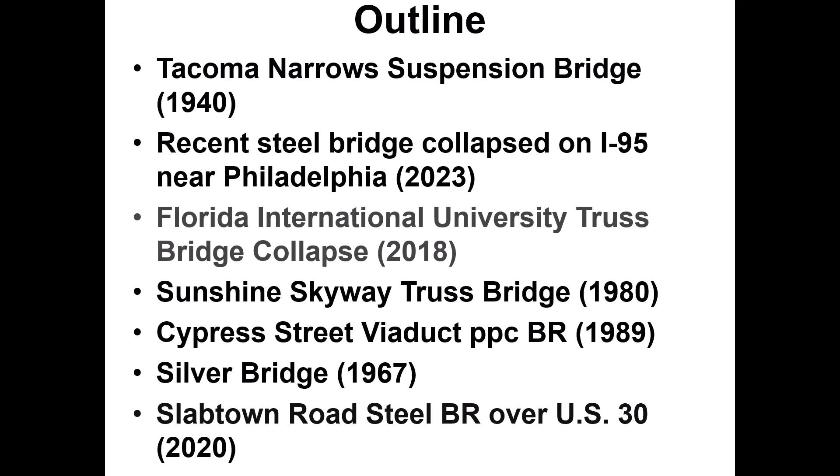This next one is the Slabtown Road Steel Bridge over US 30 in Ohio. This bridge collapse was caused by a collision when a truck was too high, exceeding the minimum vertical clearance, so it hit the steel girders.

Then I will talk about a bridge collapse: an adjacent box beam bridge collapse due to corroded steel strand. Then I will talk about the collapse of the I-35W bridge, a very famous deck truss bridge that collapsed in 2007, causing 13 deaths. Then I will talk about the Marcy pedestrian steel bridge collapse, due to steel girder buckling during construction.

The next one is the girder collapse of the San Cruz Bridge in Arizona during precast pre-stressed concrete beam bridge construction. Then I will talk about the famous Wakota Segmental Bridge, where the contractor found cracking in the web of the segmental box during construction. Next is the Leo Frigo Memorial Bridge, which had a big settlement at the pier due to corroded steel piles.

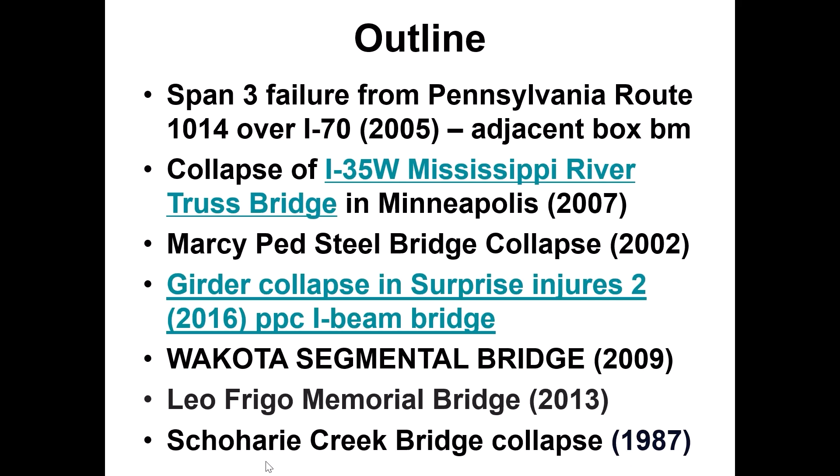The next one is the Schoharie Creek Bridge collapse due to a scour issue. My screen froze, hold on a second. Okay, the last one I'm going to talk about is a bridge on I-75 that collapsed during demolition. So I pretty much cover everything from design to construction.

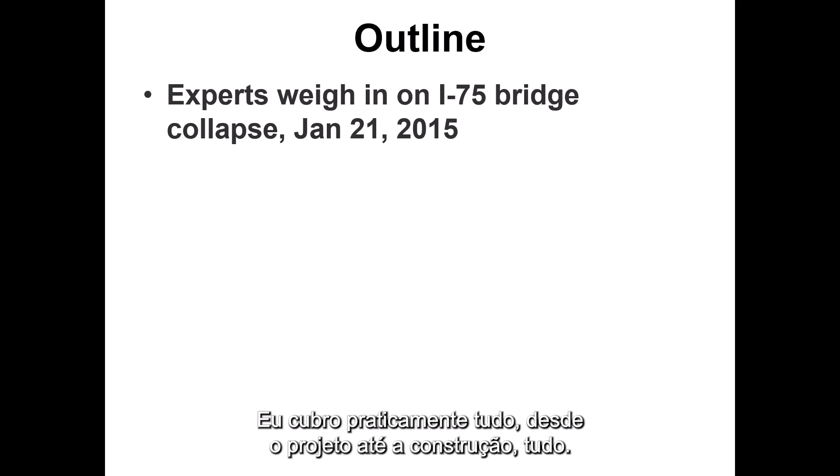So what are the causes of bridge failure? Well, due to collision, like the one in Philadelphia - sorry, the Slabtown Bridge, that's one due to collision. Then floods - the second to last one - floods cause scour, which causes substructural failure and may cause bridge collapse. Unexpected events, accidents, construction incidents like the last bridge failure. Then design flaws and manufacturing errors, fires - that's the one that happened 3 months ago in Philadelphia. Of course, the last one is due to earthquake.

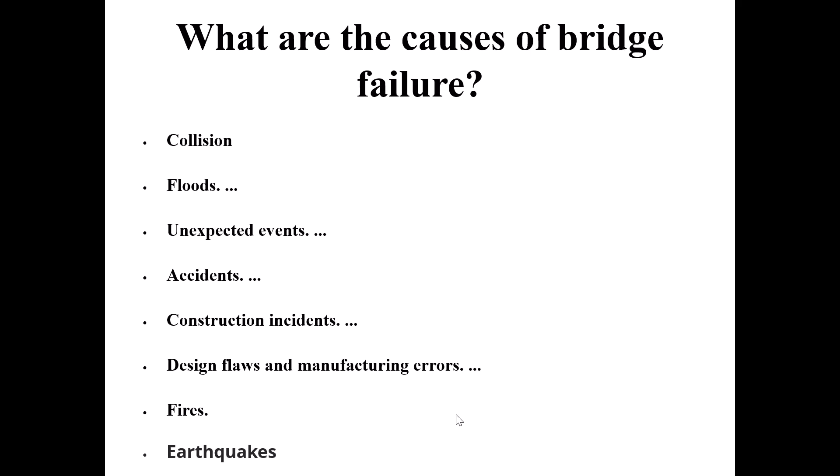Now I'm going to talk about the most famous bridge failure: the Tacoma Narrows Bridge. It's a suspension bridge built around 1938 or 39, about the same time as the Golden Gate Bridge in San Francisco. I think this bridge failure is due to vibration, because the superstructure is too shallow, and the resonance - I forgot how many people died during the bridge collapse.

This bridge failure led to wind tunnel testing for all major bridges, like suspension bridges, cable stay bridges, and long span arch bridges. From the wind tunnel testing, you can get all the aerodynamic characteristics to make sure the stiffening girder is deep enough, and the shape of the superstructure is good enough, to prevent the resonance or severe vibration of the bridge.

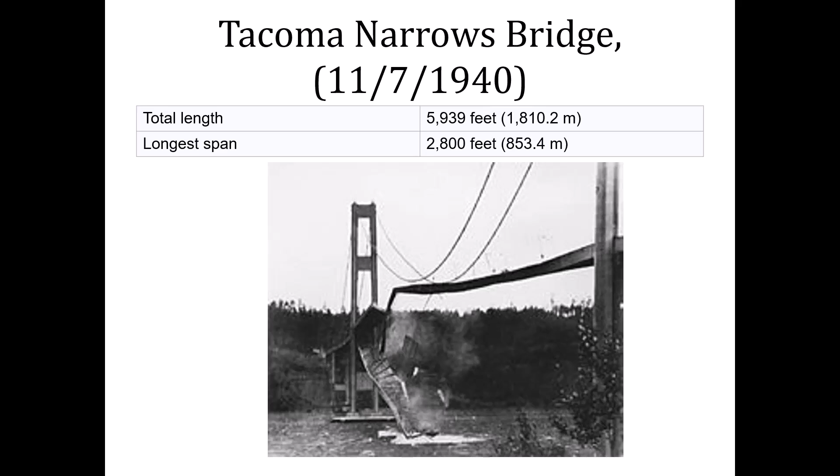This picture shows the steel bridge that collapsed on I-95 near Philadelphia about 3 months ago due to a fire from a truck. You can see the steel girder couldn't resist the fire well - pretty much like the World Trade Center. When the 2 planes hit the World Trade Center, the 2 buildings collapsed. When you have high temperature, the steel girder will lose its capacity.

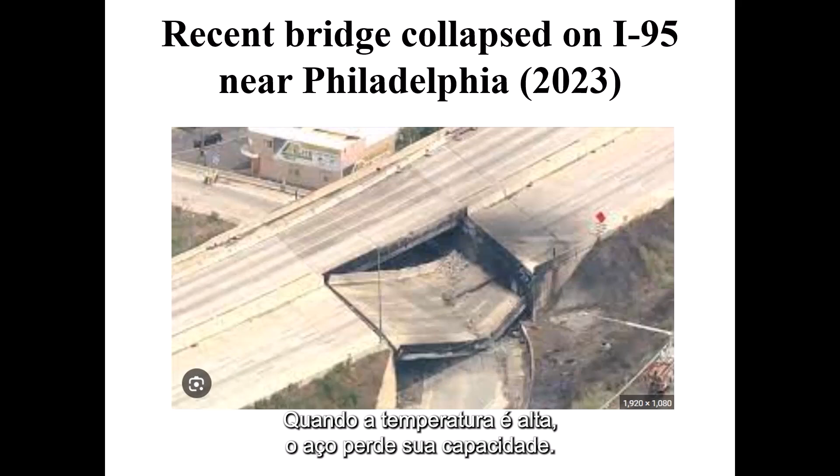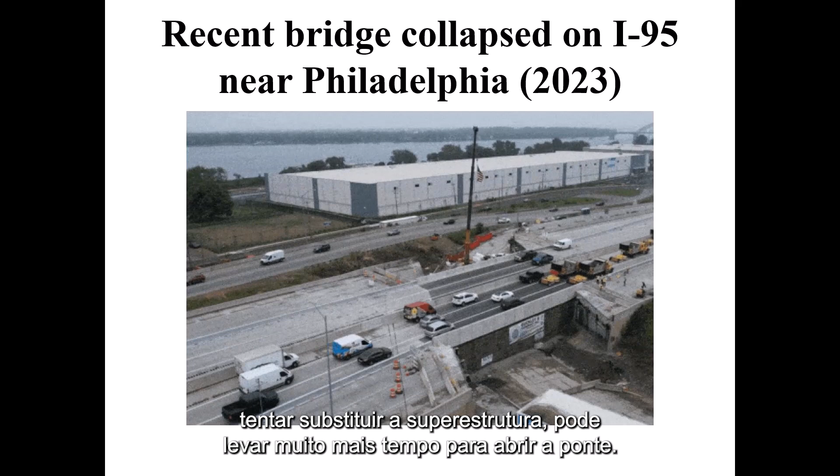This picture shows the repair on this bridge, which is unusual. They pretty much just closed down the roads under the bridge, then put in a fill with something like foamed glass or a special fill, so they could open the bridge quickly - because otherwise, if you try to replace the superstructure, it may take much longer to get the bridge open.

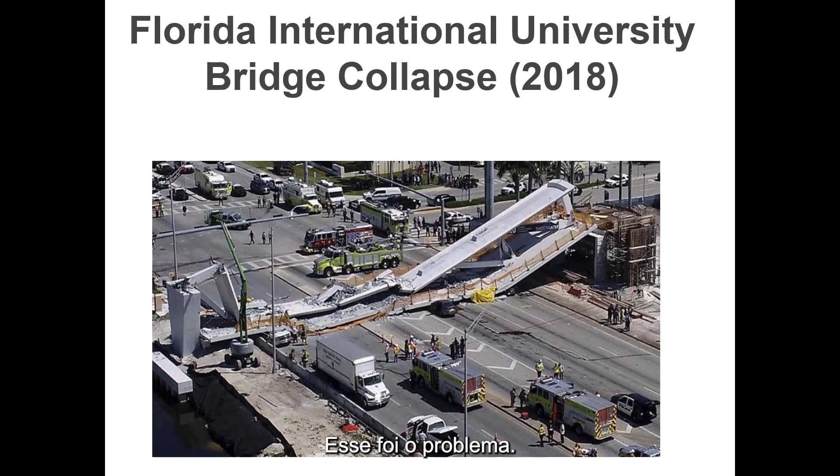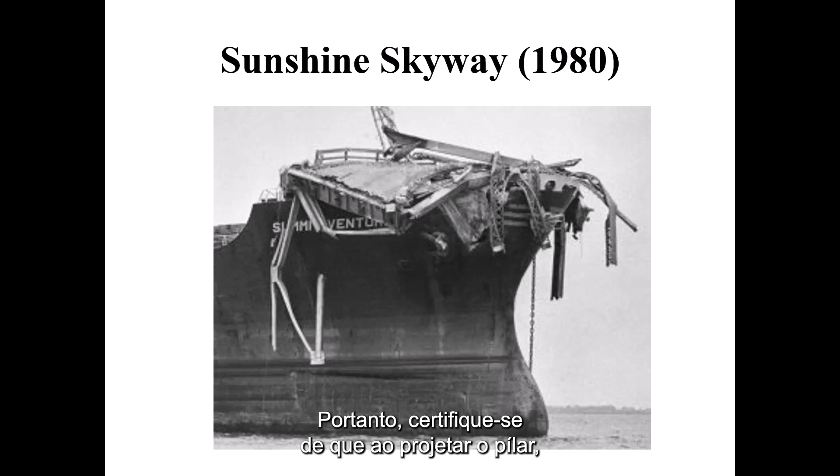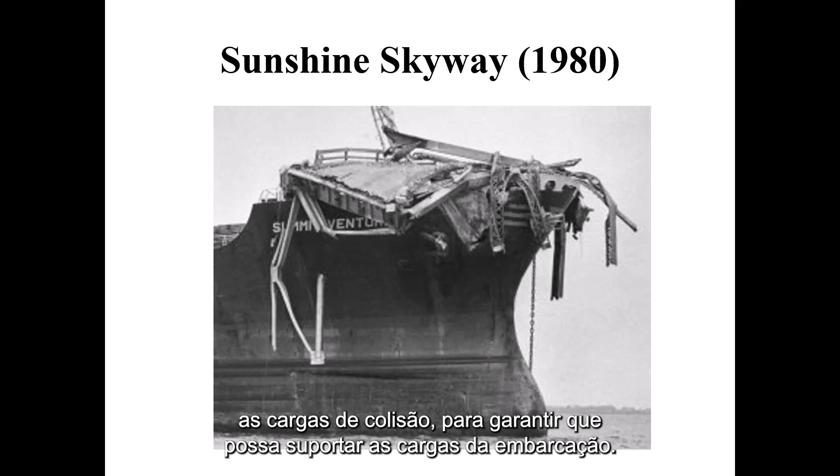This is the Sunshine Skyway Bridge. I think the existing bridge is a truss bridge. I think a boat hit the pier, causing the bridge collapse. After this, AASHTO included vessel collision design specifications, so when you design the pier, you have to design dolphins or something, or design the pier to take vessel collision loads, to make sure they can take the loads from the boat.

This is the Cypress Street Viaduct collapse. It's a pre-stressed, precast concrete beam bridge that collapsed during an earthquake. I think mainly the columns didn't have enough confinement. After that, it led to lots of seismic design improvements to make sure the column is ductile enough to take the seismic load.

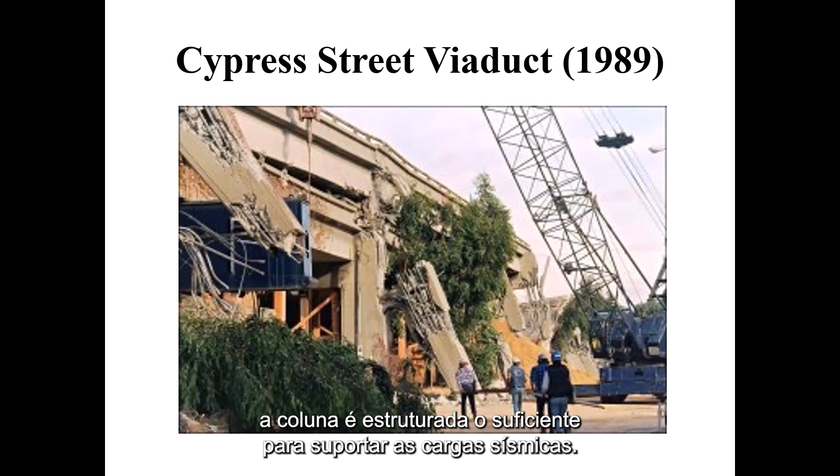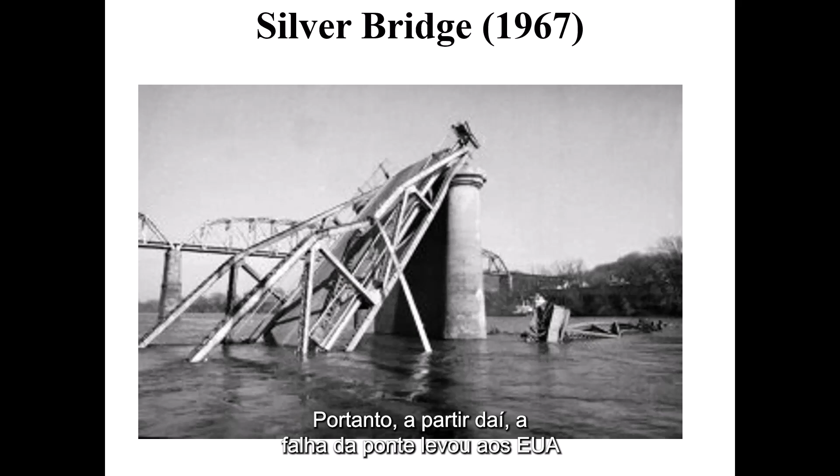This is a very famous Silver Bridge, a truss bridge. The bridge collapsed due to the eyebar tension fracture. We all know the truss bridge, all the tension members are fracture critical members, so as long as one member collapses, the whole bridge will collapse. This bridge failure led us to conduct bridge inspection once every 2 years.

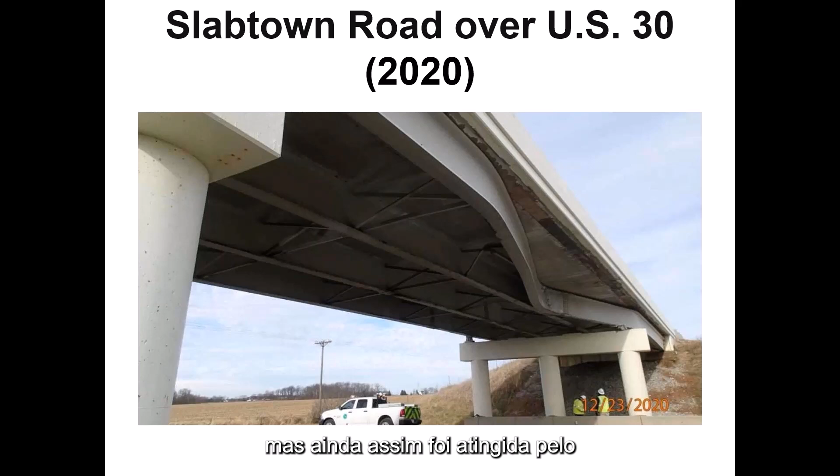This is the Slabtown Road Bridge over US 30. You can see the steel girder is bent due to being hit by an overheight truck. I think in the future, everywhere you see the weigh station for trucks, they might have to check the truck's vertical clearance to make sure they won't hit the bridge. I didn't see any posting for vertical clearance, so I assume it met the minimum required by the DOT, but it was still hit by the truck, which means the truck was way too tall.

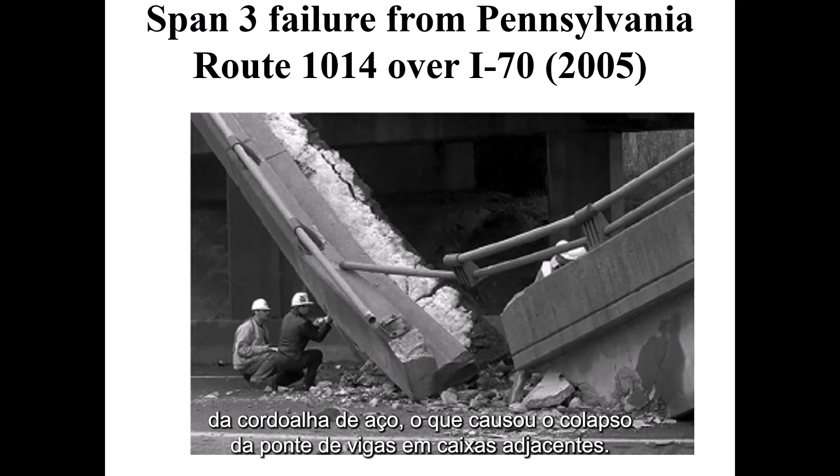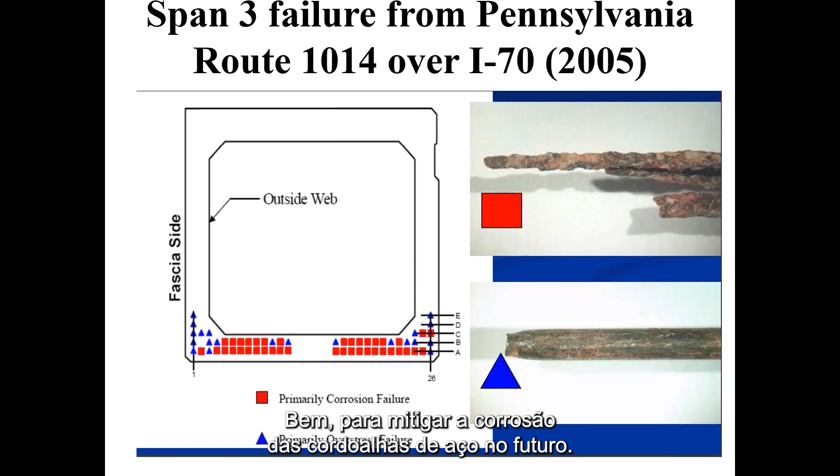This is a bridge failure from Pennsylvania, an adjacent concrete box girder bridge. For any bridge built 30 or 40 years ago, there's an issue with the steel strand for the adjacent box girder. Either the concrete cover isn't deep enough or some other reason. There are quite a few bridge failures due to corrosion of the steel strand causing adjacent box girder bridge collapse. This picture shows the concrete box girder section; the red is the corroded strand. You can see most of the strands, I believe at the center span, lost lots of capacity due to severe corrosion. It's tough to inspect. I think Illinois DOT improved their adjacent box girder details to mitigate steel strand corrosion in the future.

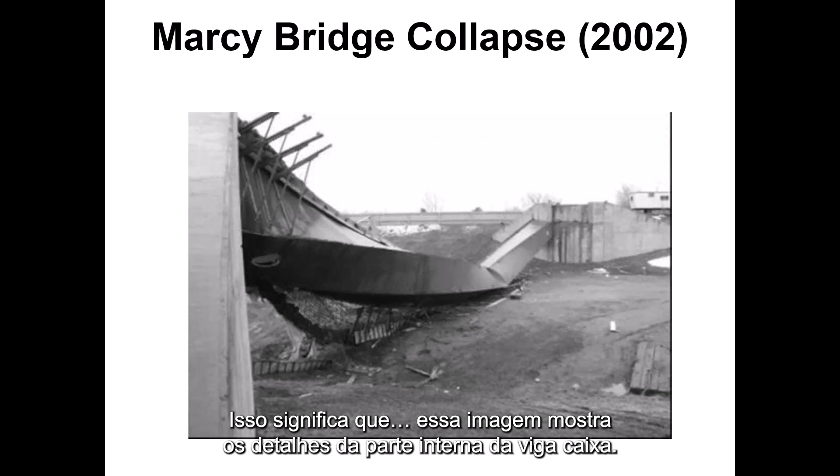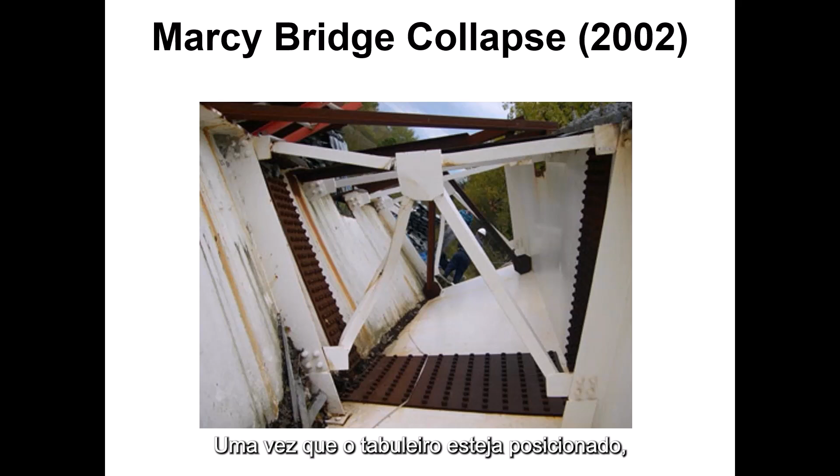This is the Marcy Bridge, a pedestrian bridge, still a steel box girder bridge. You can see the girder twisted during construction. This picture shows the inside of the box girder detail. It's very important to make sure the steel beam is stable during construction, meaning you have to provide enough internal or external diaphragms to make sure the steel girder won't buckle during construction. Once the deck is hardened in place, typically the bridge should be safe.

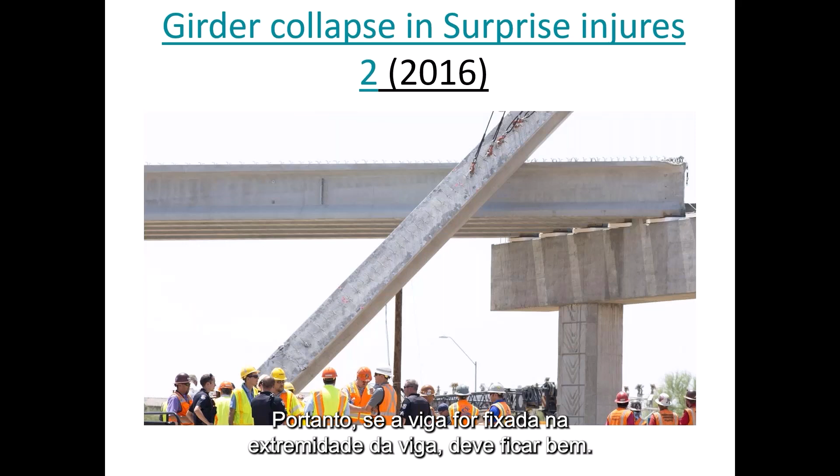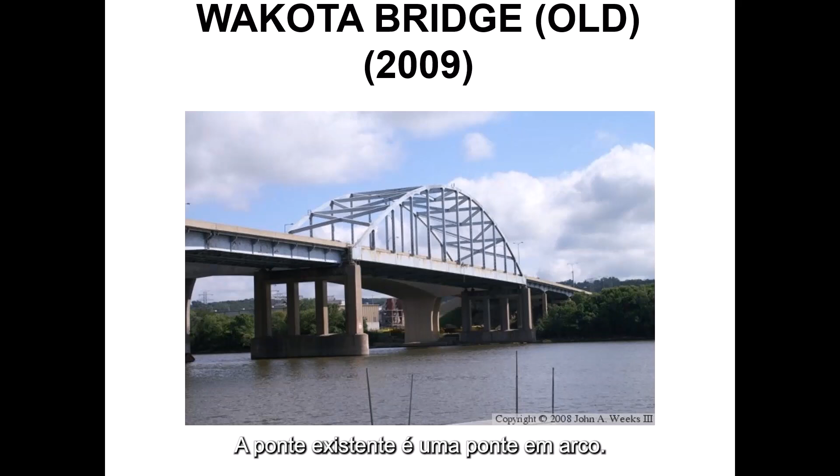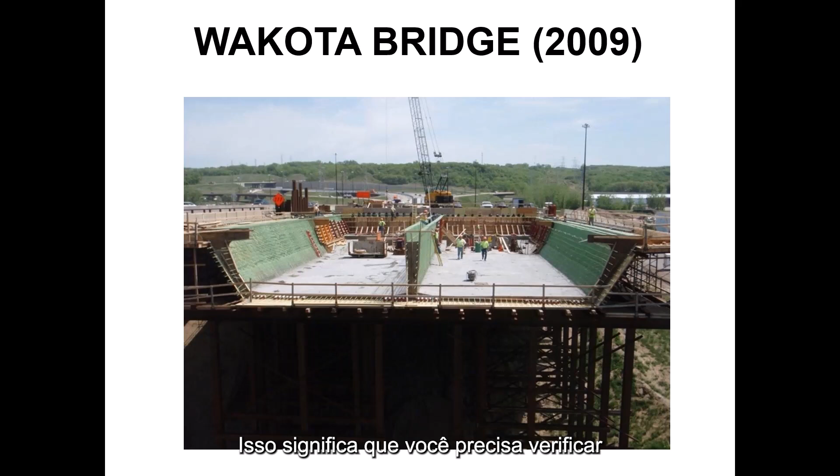Here's the Wakota Bridge. The existing bridge is an arch bridge. The new bridge is a two-cell segmental box girder bridge, a very wide bridge with only 3 webs, over 100 feet wide. During construction, they found cracking in the webs. For segmented bridges, they are not supposed to crack because you design all components with zero tension, which means you have to check all the principal stresses for every component.

Here's the finished product. After they found the cracking in the webs, they hired a person to perform an independent design. They proposed internal post-tensioning to strengthen the bridge, even before it opened to traffic. I think the cost for this rehabilitation may be around $10 million.

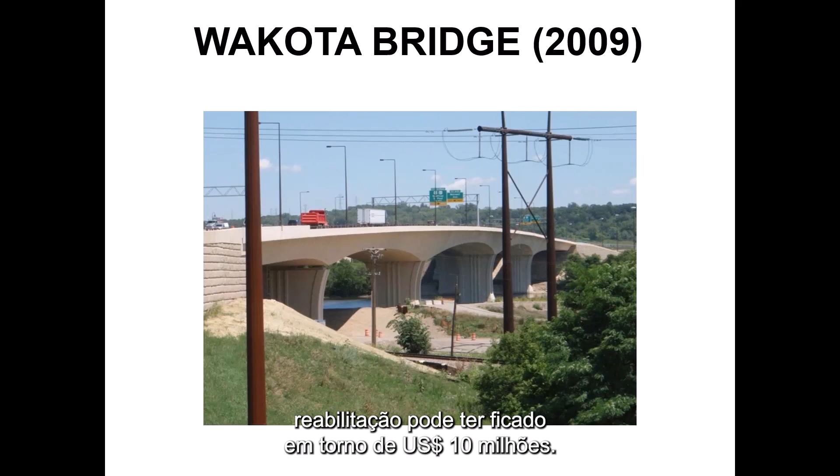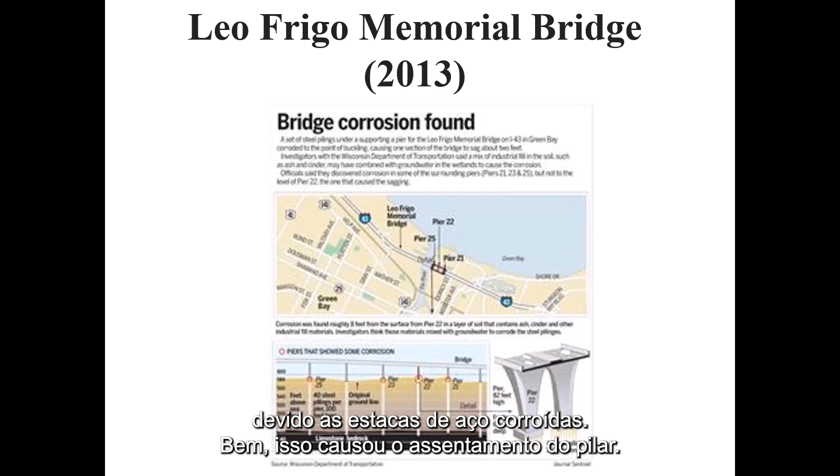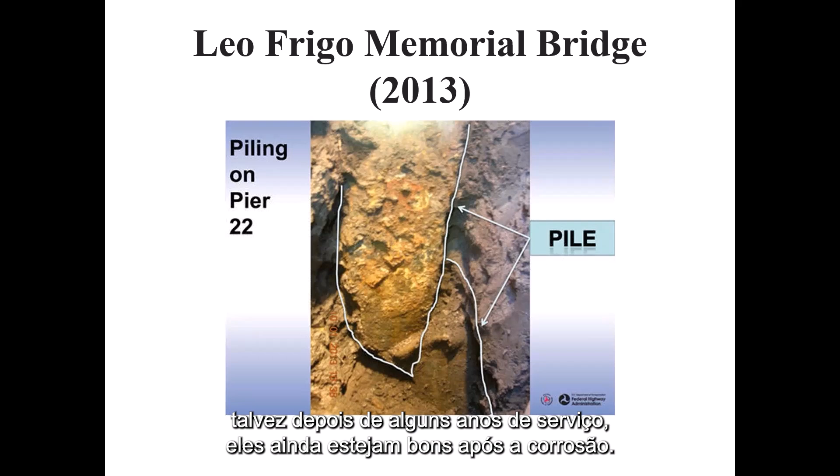Now I'm going to talk about the Leo Frigo Memorial Bridge in Wisconsin. I think in 2013, one or two piers settled by 1 or 2 feet because of corroded steel piles. After they removed the piles, they could see severe corrosion due to very bad soil conditions around the steel pile. This means during geotechnical testing, they should test the soil to see if it may cause steel pile corrosion, and remind designers to thicken the steel pile so it's still okay after certain years of service despite corrosion.

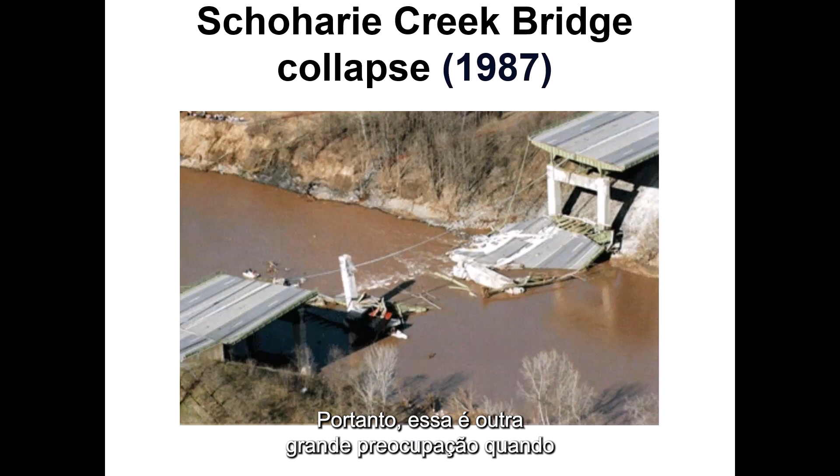This bridge shows collapse due to scour from a flood. That's another big concern when a bridge is built over a river or creek.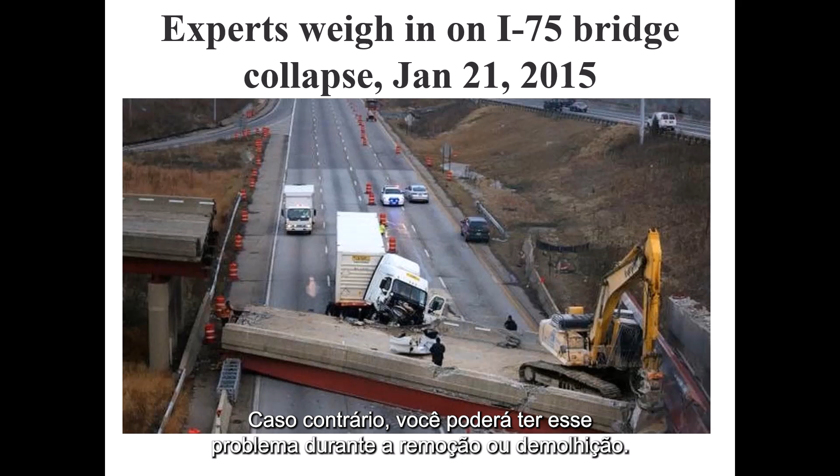Yeah, this is the bridge collapse during the removal of the existing bridge. So that means, especially for certain types of steel bridge built a long time ago, when they have those pin connections, you make sure the removal sequence is correct. Otherwise, you may have this kind of problems during the removal or demolition.

Now I'm going to talk about some repair methods. For steel bridge damage, typically use straightening or strengthening on the damaged steel plate girders. Or you can replace the beams, which cost much more money, or you can strengthen the damaged steel girder with plating with bolted connections.

For concrete deck, then you typically use epoxy seal on the cracking, or use a partial or full deck repair. The last repair method, UHPC overlay, is not commonly used.

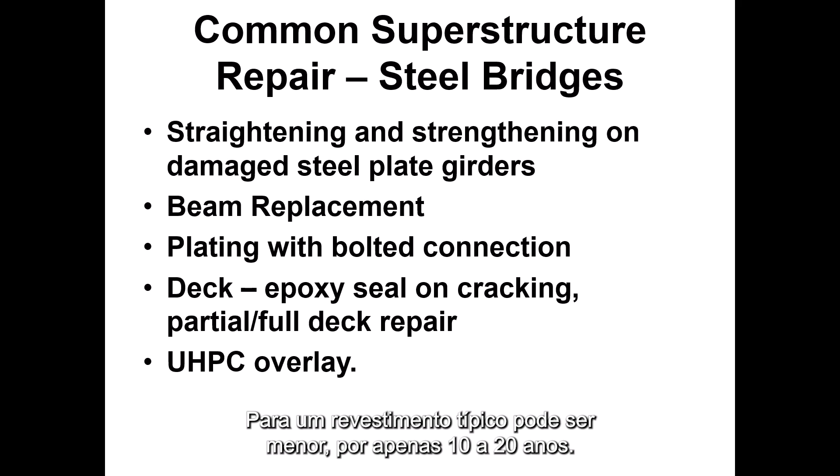I think in Iowa they used the first UHPC overlay in the US a couple years ago. The problem is they last much longer than the conventional asphalt or other concrete overlay, but UHPC is a very expensive material. They cost about 5 times higher than conventional concrete. They told me the UHPC overlay could last for over 50 years, which is very close to the bridge design life. A typical overlay may last only 10 to 20 years.

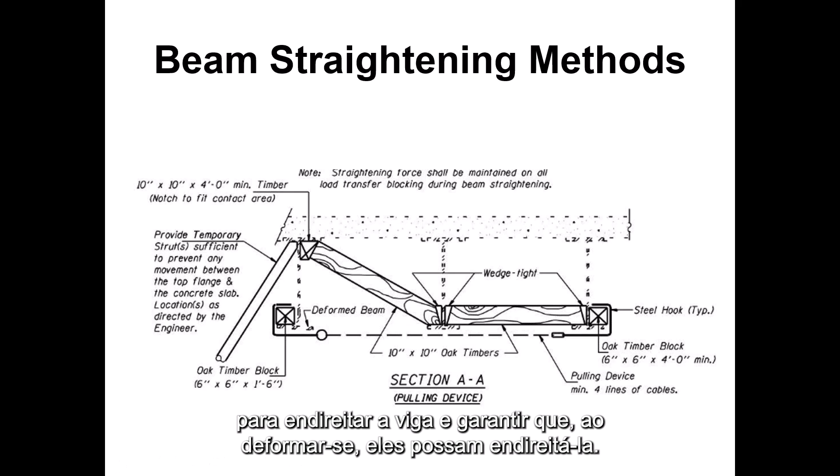Here's a picture showing how to straighten the steel beams. This detail is from Illinois DOT. You can see they use some timber blocking, then they use some jacking to straighten the girder, to make sure when they bend it, it straightens back.

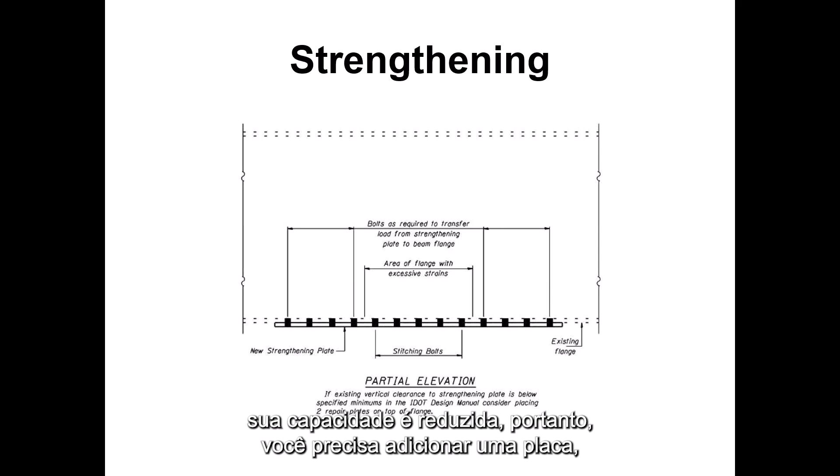Here's another picture showing the typical strengthening detail from Illinois DOT. This detail shows the steel girder strengthening. If there's damage, the girder may lose capacity, so the capacity is reduced and you have to add a new plate bolted to the existing girder to increase the girder capacity. Here's a common superstructure repair for the PPC, pre-stressed precast concrete beam bridge.

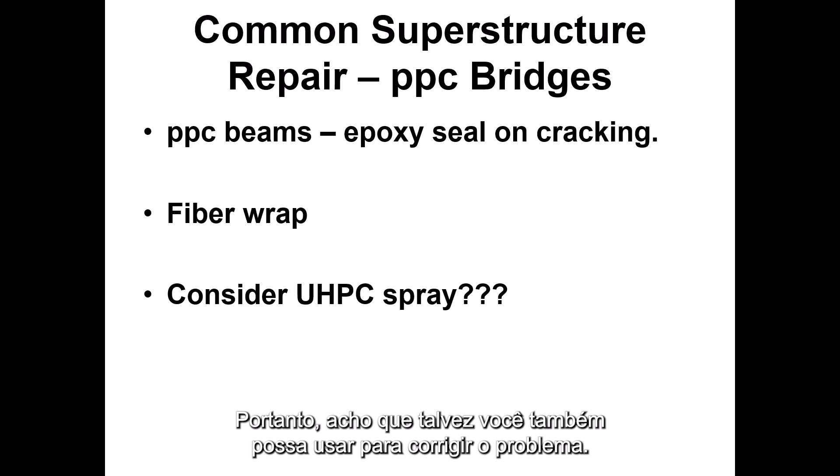So I think maybe you can use it to fix the problem as well. Here's just some common repair methods for the substructure: use the epoxy seal on the cracking, use formed concrete repairs or mortar repairs for shallow repairs, then you could use the fiber wraps. For seismic repair, you can look at some Caltrans standards.

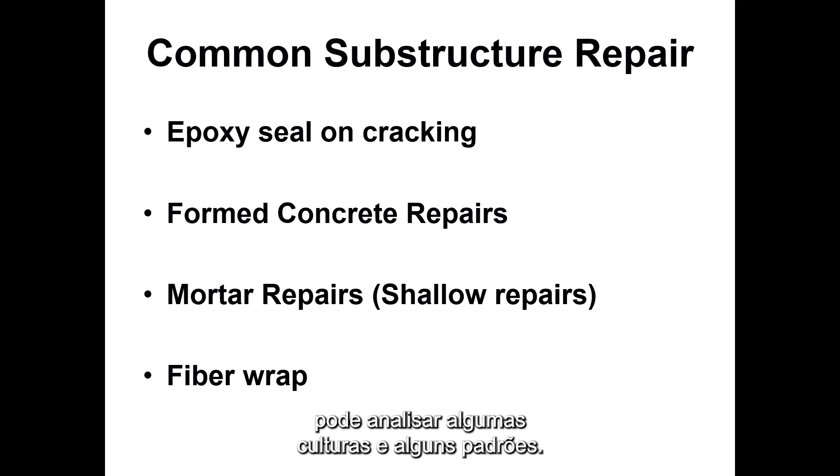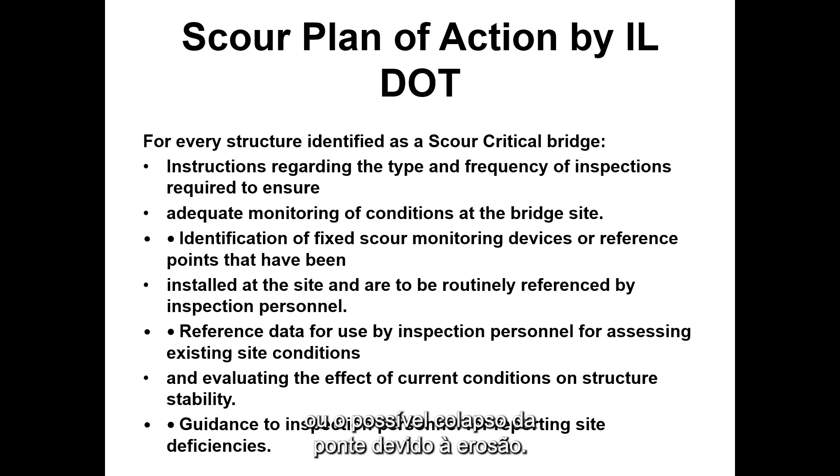Identify a fixed scour monitoring device, which I don't know what kind of device you could use to monitor the scour or the potential bridge collapse due to scour. So if you notice the water touching the superstructure or the approach roadway being overtopped, then you have a big concern for scouring.

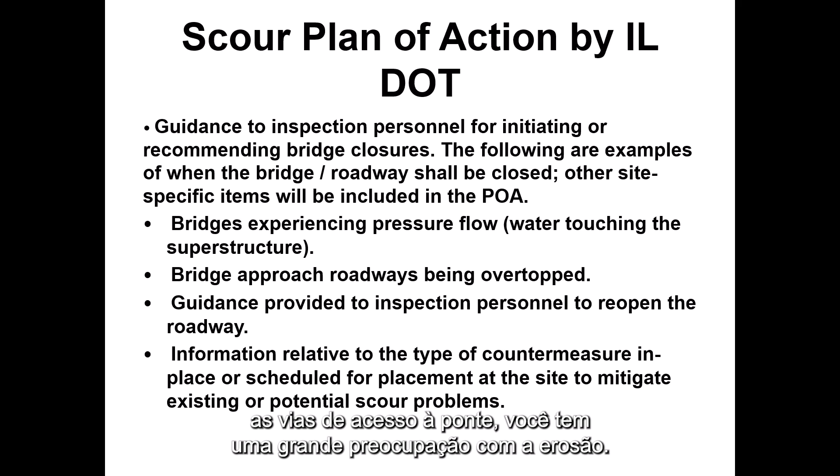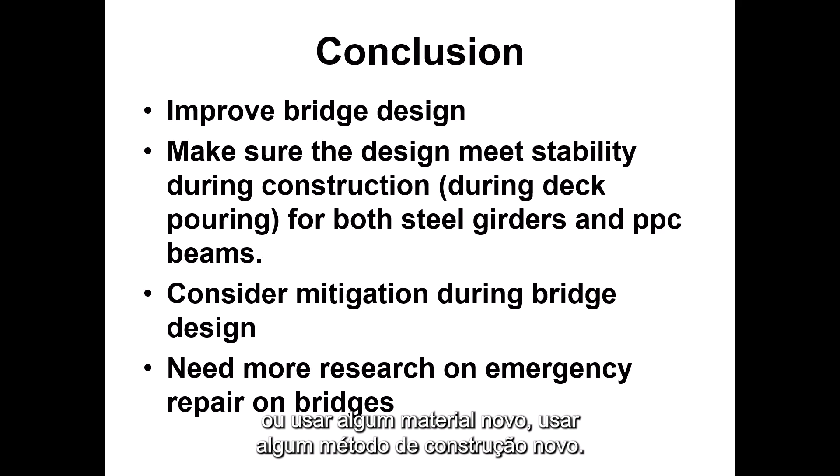Well, that's the end of my presentation.

Any questions? First question we have is, do they need to be preheated? I assume it was in regards to the last one. Yeah, for steel, you're right.

For steel girders, if it's caused damage, I think some DOTs allow preheating. I don't think Illinois DOT allows preheating. I remember in Pennsylvania, when I was working on one steel girder bridge damaged by a truck, I think they preheated, using a V-shape preheat pattern to strengthen the bridge, to make the steel or bent web or flange go back to its original position. So I think it depends on the DOT, and also you have to look at the specs or special provisions to make sure they allow preheating, because I remember, I could be wrong, that Illinois DOT does not allow preheating.

Okay. Give me one second, we have more coming in.